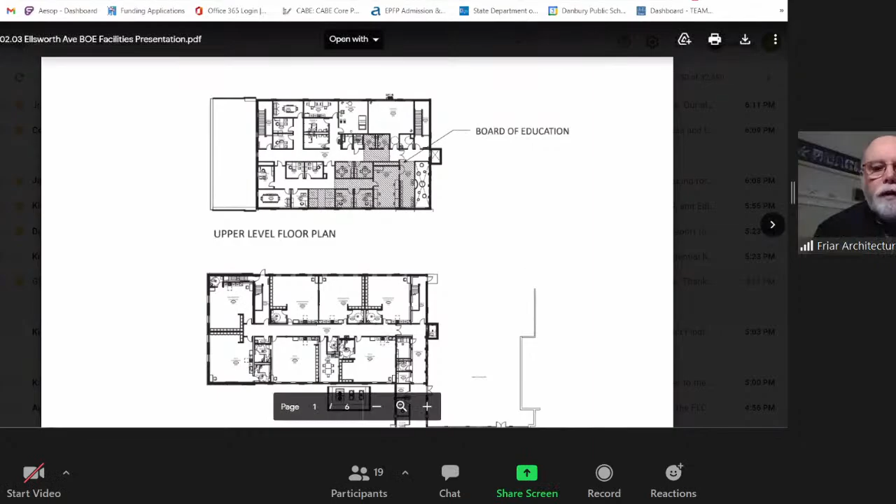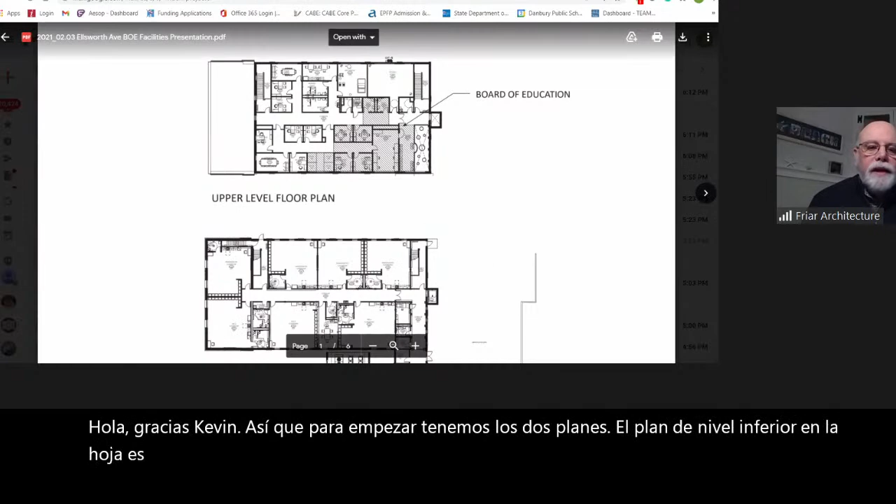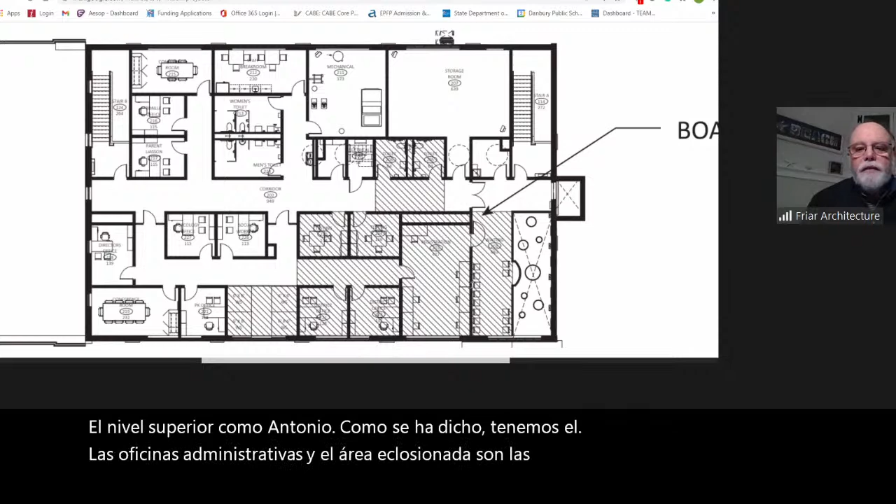Okay, thank you, Kevin. So to start off with, we have the two plans. The lower level plan, lower on the sheet, is your first floor. Just to orient you, Osborne Street is to the left, and the existing school is to the right. The upper level, as Antonio has said, we have the administrative offices, and the hatched area is the areas that are designated for the Board of Ed, the registration, testing, and so forth for the second floor.

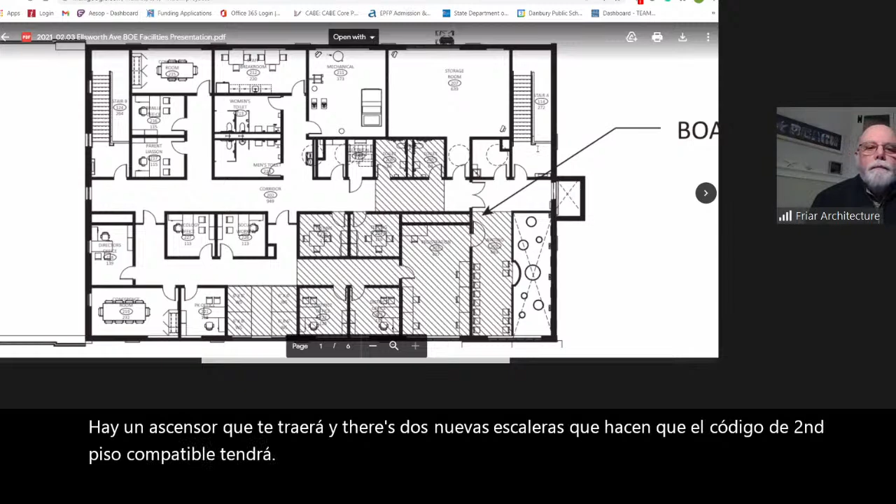So there is an elevator that will bring you up, and there's 2 brand new stairs that make the second floor code compliant. We'll have enough bathrooms up there for staff. There's also a conference room, a break room, and then we have mechanical and some storage space along with the offices for the individual staff. If we can go downstairs real quick.

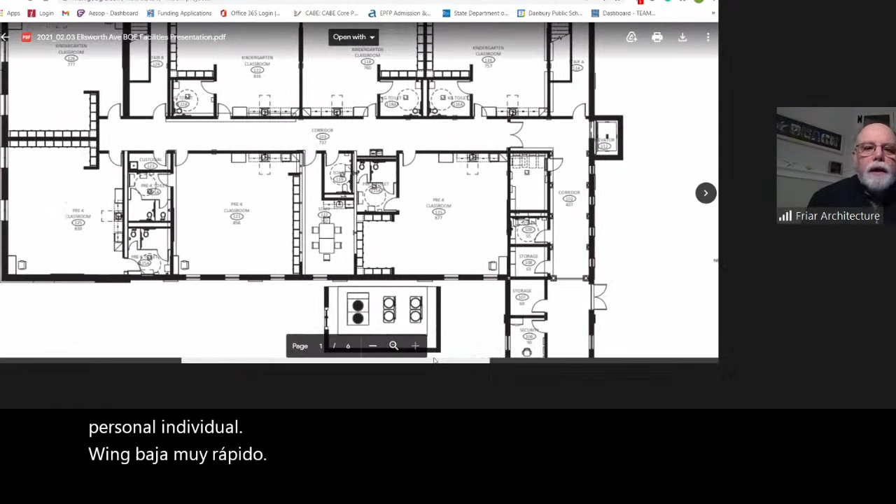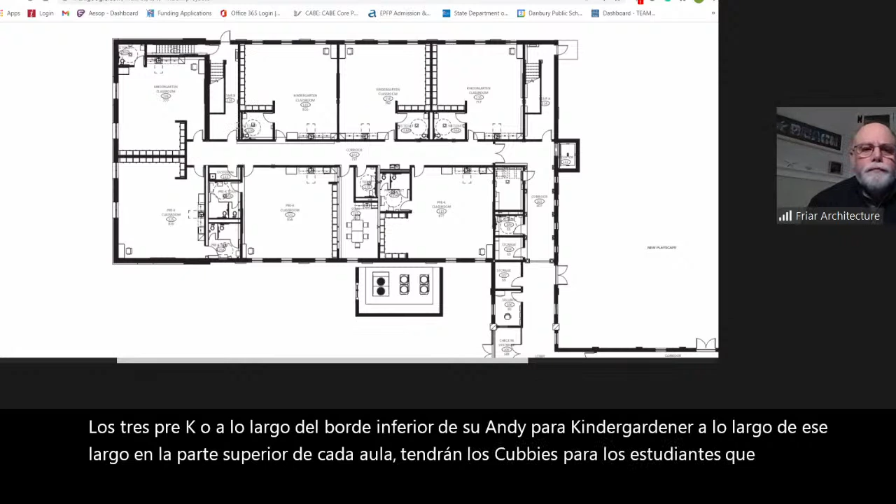Here we have our classrooms. The 3 pre-K are along the bottom edge there, and the 4 kindergarten are along the top. Each classroom will have the cubbies for the students. They will have individual toilet rooms, and the pre-K will have 2 toilets to meet that code requirement. We have again the elevator, and if you can scan down a little bit towards the entry, you'll see this is the new entry to this area.

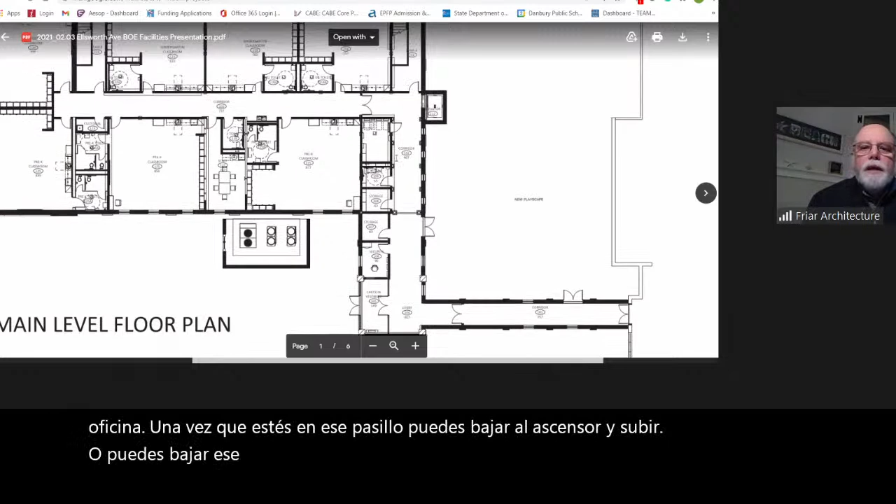It comes off of that parking lot that's already there into a secure area, and you will have to be buzzed in by the security staff that'll be in that office. Once you're in that corridor, you can go down to the elevator and go upstairs, or you can go down that corridor into the individual classrooms. The doors to get you into that classroom will be on access control, so there's limited access for other people that are coming in to go upstairs.

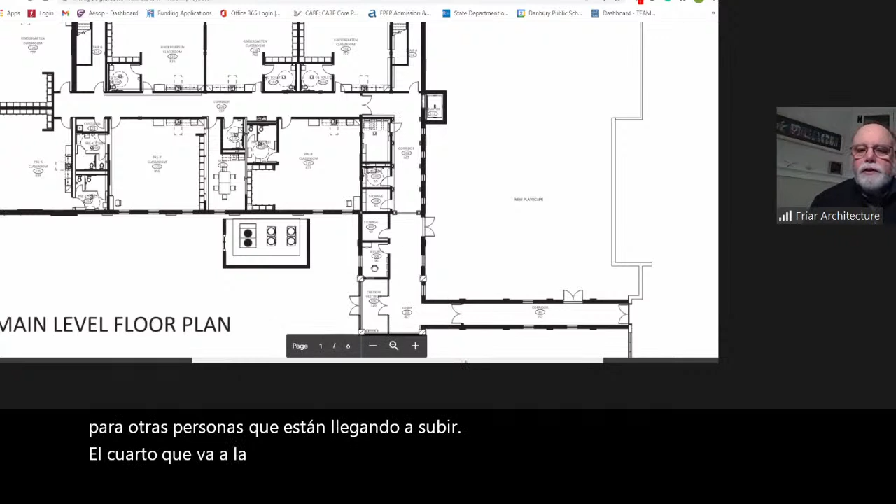The corridor that goes to the right will lead you back to the main school, and it's connecting right in the cafeteria. That's an existing door opening that's in the cafeteria. So the way it works right now is the students that may be in that cafeteria may be dismissed through those doors to the playground, or it's just an emergency egress. But in this case, you're going to come through that cafeteria, down the corridor, and into the annex, if you will, or you can go directly out into the new playscape area.

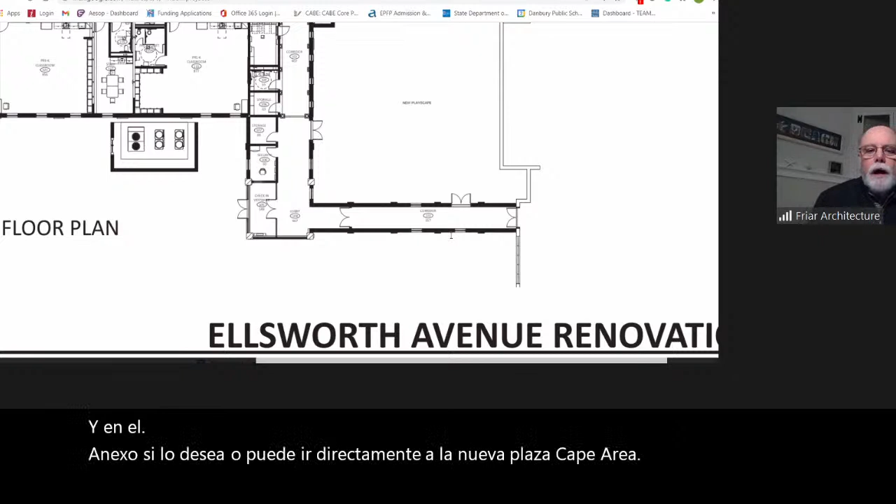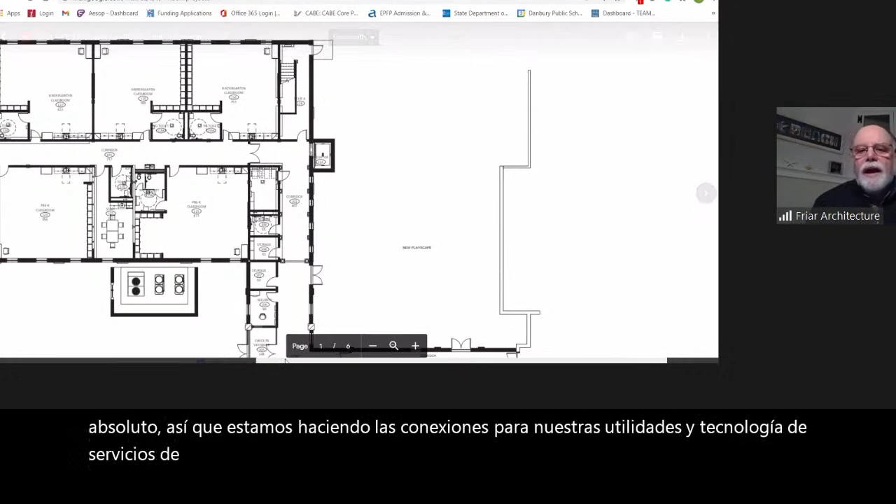There's no real changes inside the existing Ellsworth, no physical wall changes at all. So we're just making the connections for our utilities and services, technology, those kinds of things, so we can tie everything together to the existing school. If we go to the next slide.

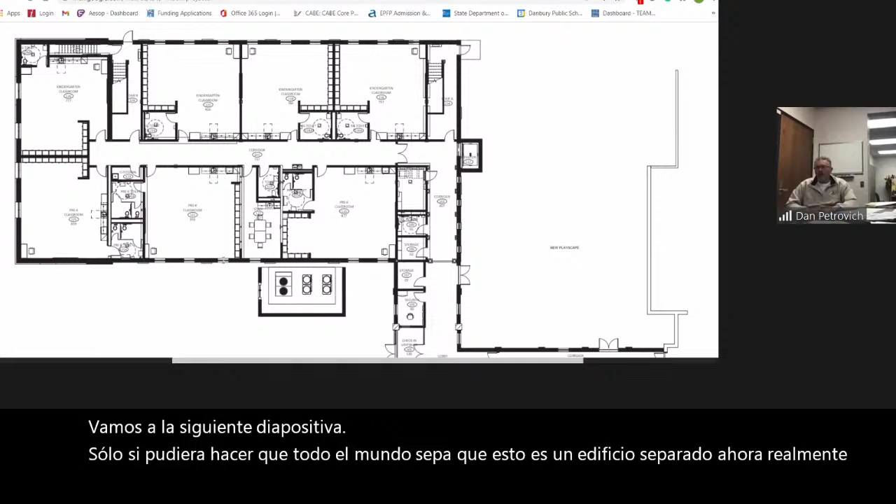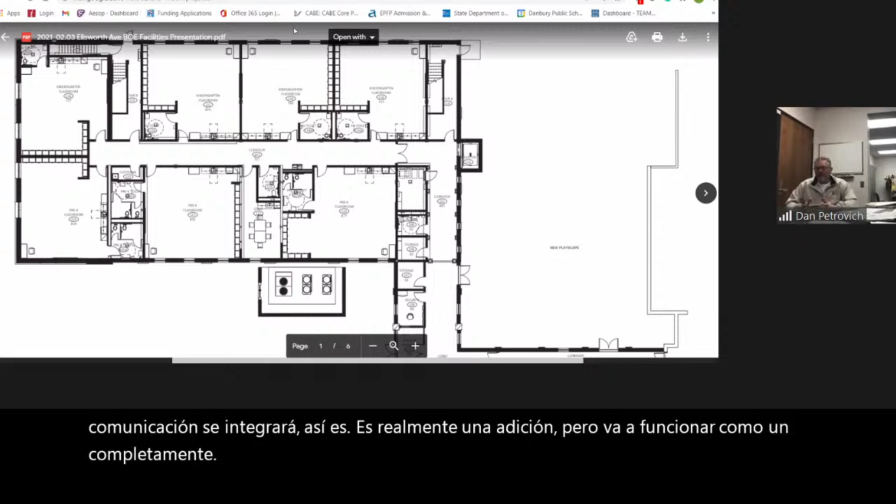Glenn, if I could just let everybody know that what is a separate building now will actually function as really one school. What I mean by that is the fire alarm system will all be integrated, the telephone system, the communication system will all be integrated. So it is really an addition, but it's going to function as a completely comprehensive and cohesive school. That's very important. It was very important for the staff to secure that need. Yep.

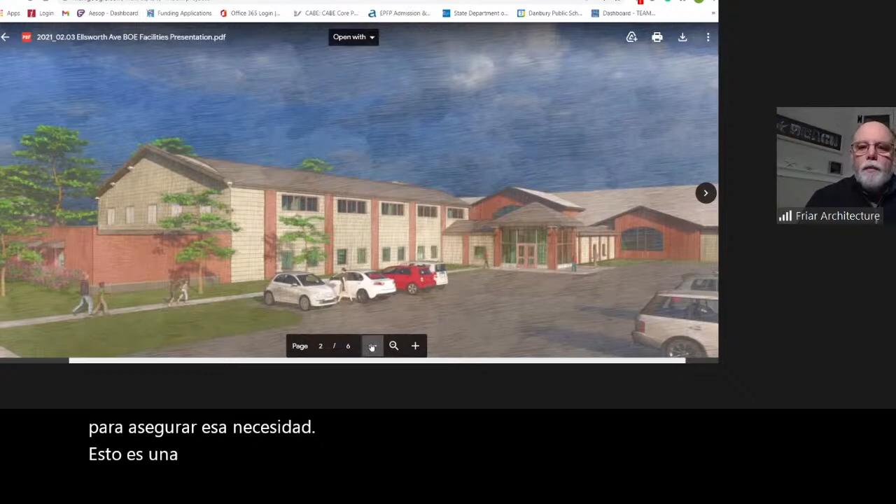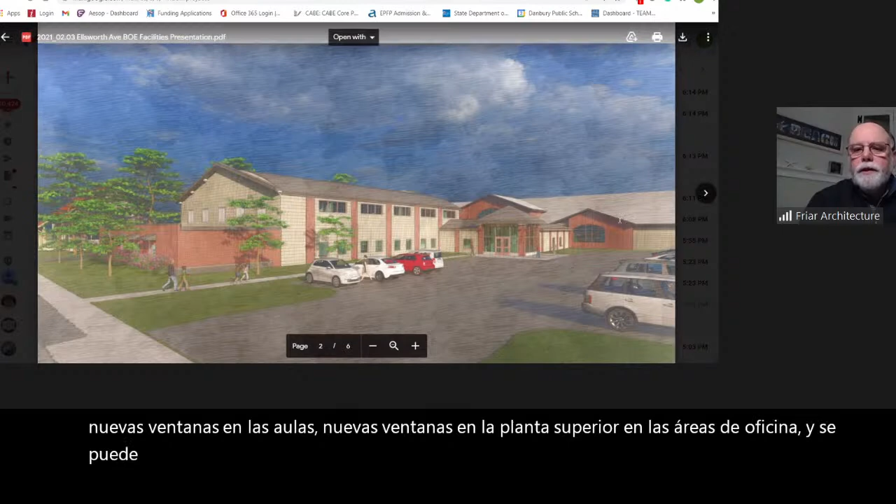The next slide. This is kind of a representative of what we're looking at. So you can see that from the parking area, Osborne Street is to your back as you're looking at this. We have got new windows going into the classrooms, new windows upstairs into the office areas, and you can see the point of entrance to the building. I think we have one more slide also.

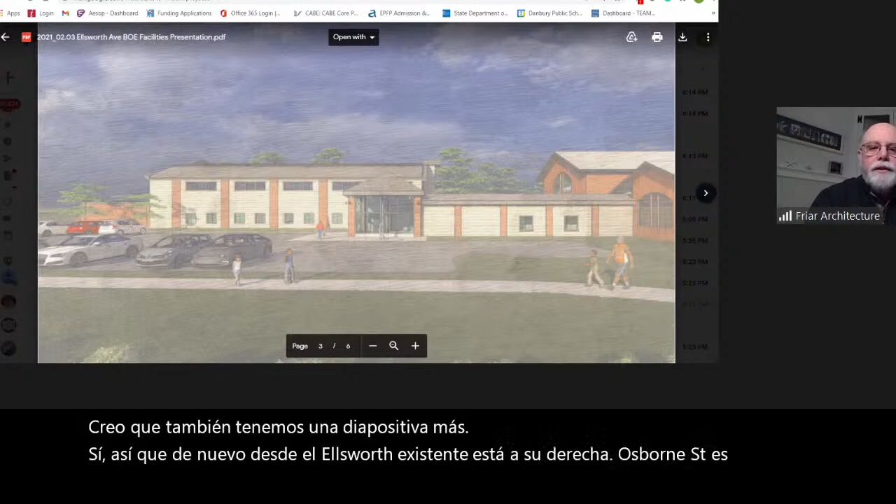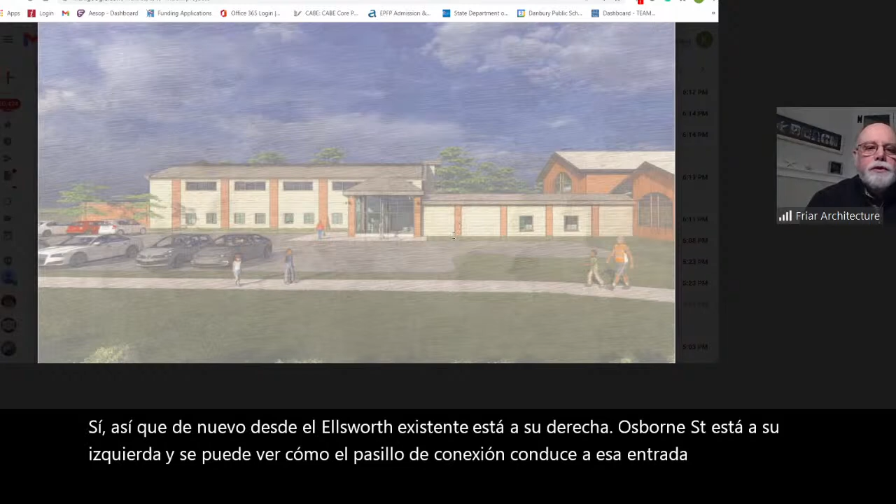Yes, so existing Ellsworth is to your right, Osborne Street is to your left, and you can see how the connecting corridor leads into that central entrance, and then the existing Osborne Street building in the background there.

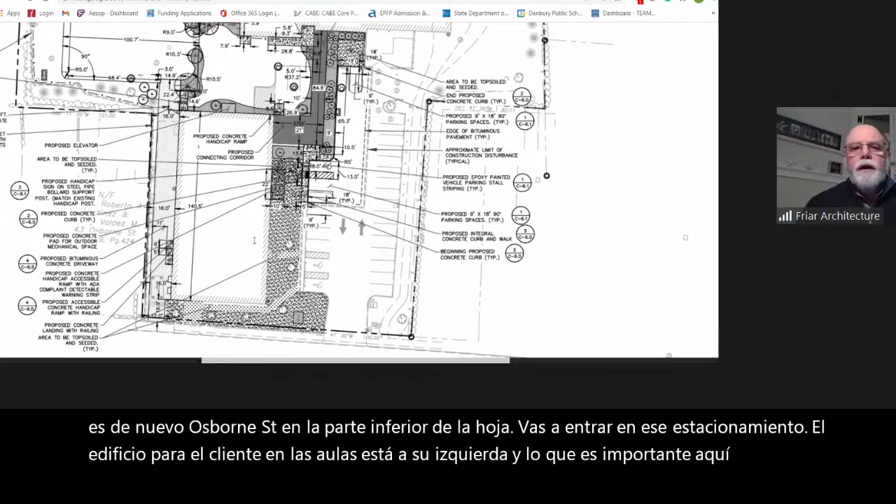So the site is in a couple pieces here. So what we're looking at right now is, again, Osborne Street to the bottom side of the sheet. You're coming into that parking lot. The building for the new classrooms is there on your left. And what's important here is that we're only taking away a few parking spaces in this parking lot, enough to put our new connecting corridor there.

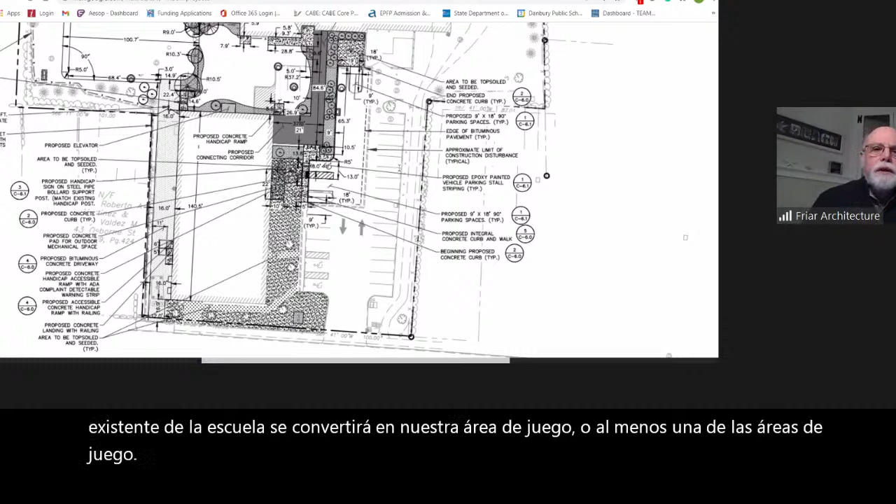So most of the parking spaces will remain, and then the area right now that is behind the existing building, between that and the existing gym of the school, will then become our play area, or at least one of the play areas. And I've got another slide which we'll get to to detail that, but just to explain a little bit more, if we can move the slide the other way up. There you go.

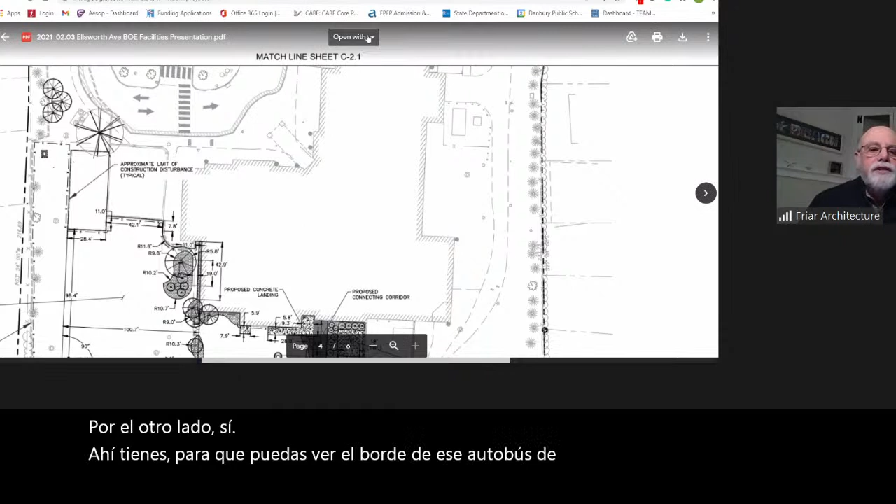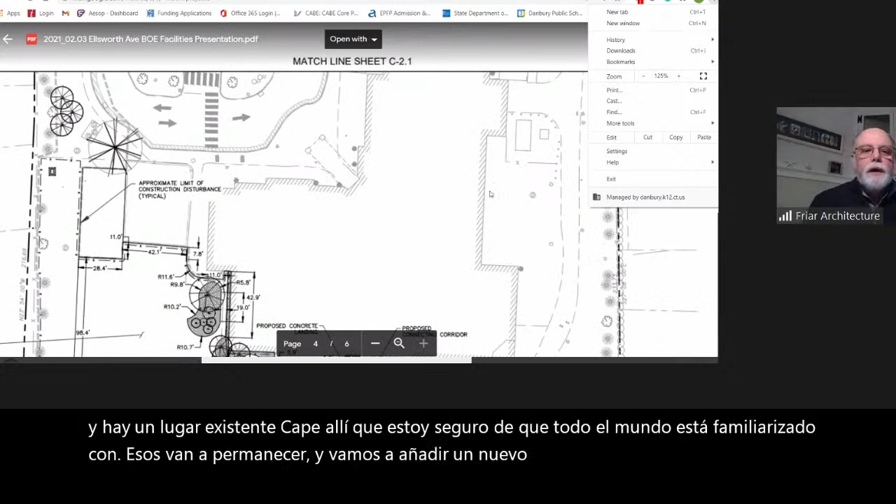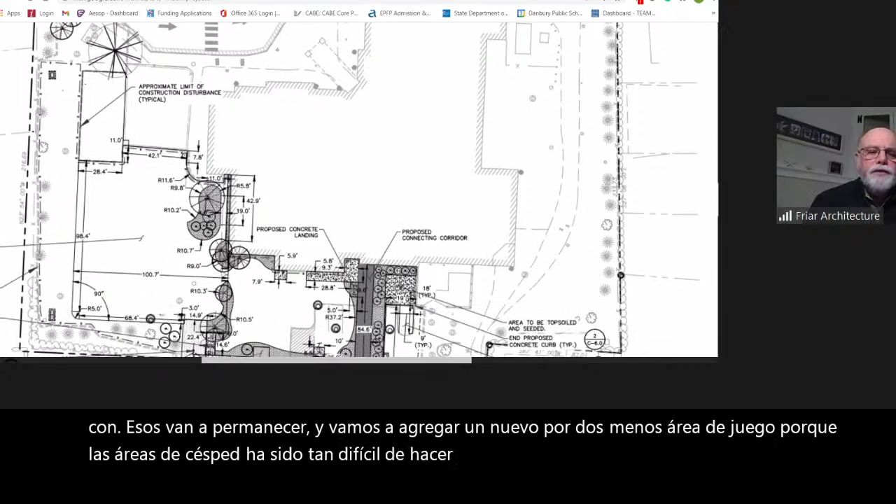So you can see the edge of that existing parking lot, bus loop, and there's an existing playscape there, which I'm sure everybody's familiar with. Those are going to remain, and we're going to add a new bituminous play area because the grass area has been so difficult to make usable. So it's going to be a bituminous area, and again, there's going to be a half basketball court in there and so forth, and I'll show that to you in a second as well. If we can go to the other half of the site now.

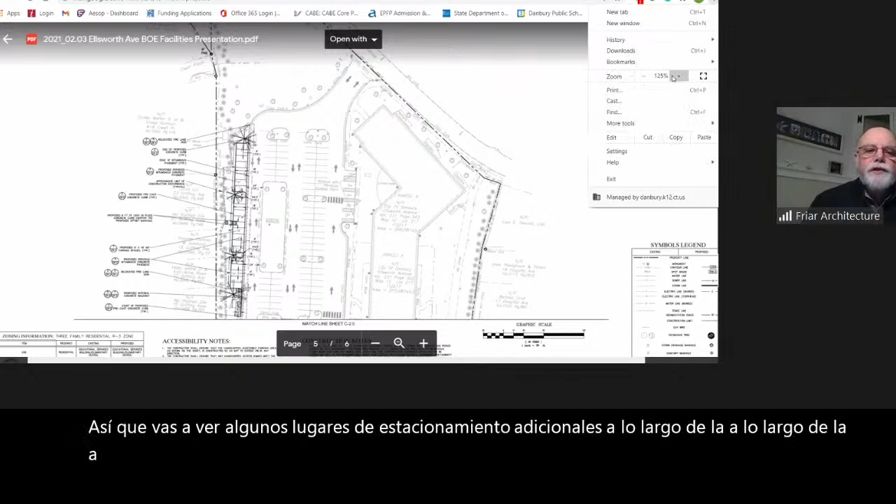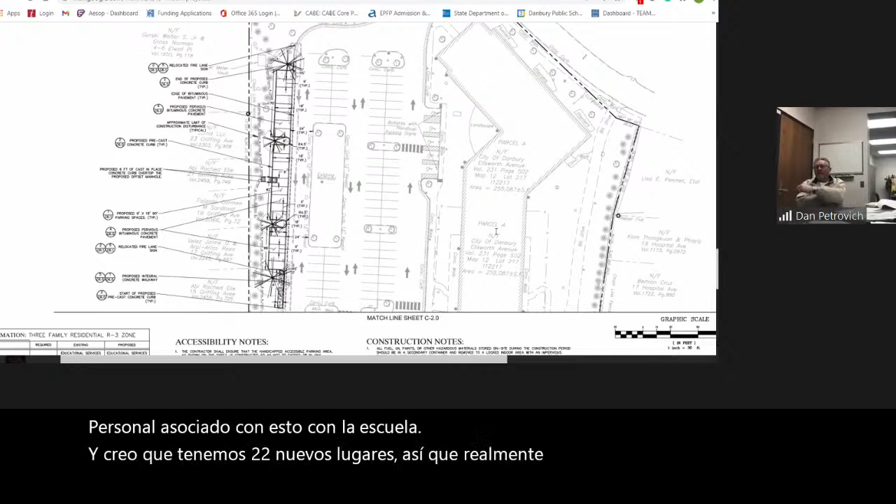So you're going to see some additional parking spots along the left side of this drawing, and those will be additional parking spots for staff associated with the school. And Glenn, I think we got 22 new spots. We didn't think we were going to be able to get that many, but we were able to get 22, which is really nice. So the parking that's on both sides should give plenty of parking between the school and registration, and will allow for some separation between those two functions.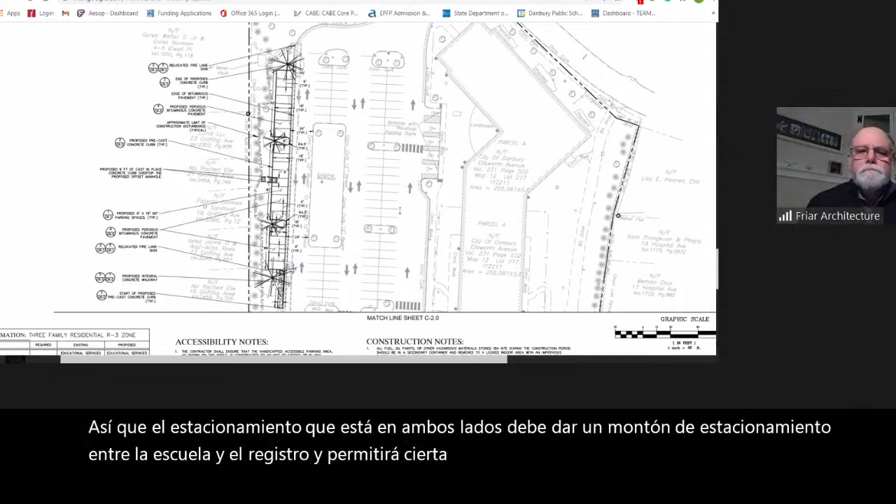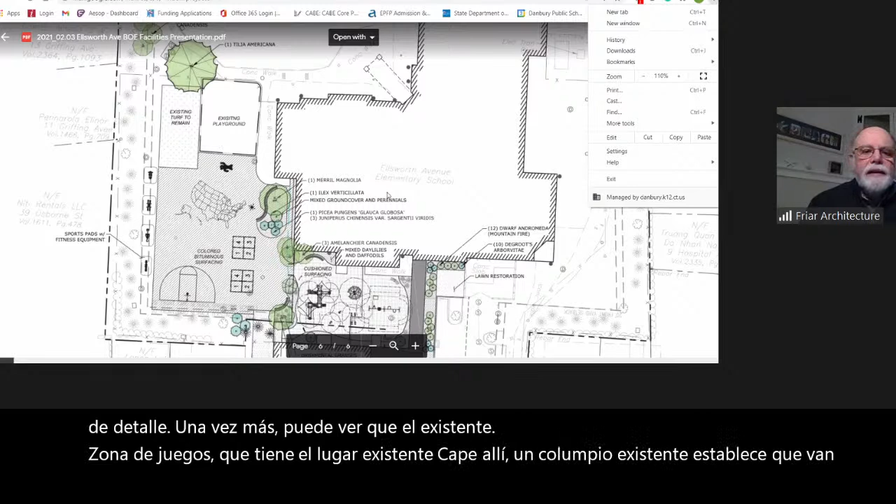And then the next site plan. This is a blow up of the play area to give you a little bit more detail. Again, you can see the existing playground, which has the existing playscape there and the existing swing sets. Those are going to remain, and we're going to add the bituminous area with some four square play areas, hopscotch, the half-court basketball, and something that's fairly popular, a painting of the United States that is used in a lot of places.

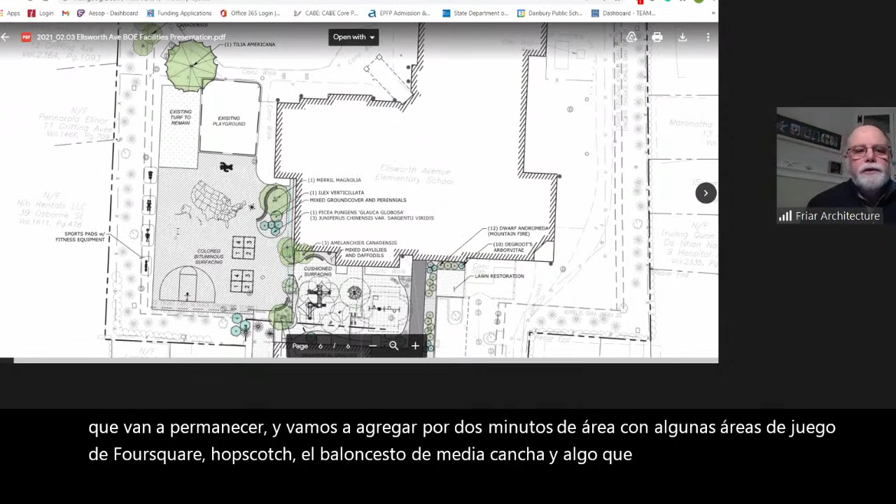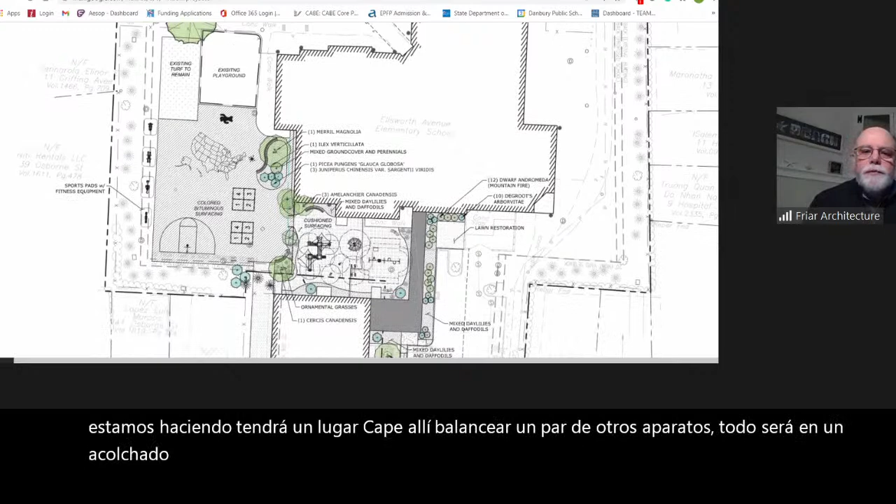And then between the two buildings, we have the playscape, which is going to be age appropriate for what we're doing. We'll have a playscape there, a swing, a couple other apparatus. It'll all be on a cushioned rubberized surface for safety. Each piece has a safety zone that's required, so you can't just cram a lot of items in there because you have to maintain a safety zone. So we've done that, and there'll be some benches and so forth in there. It should be really kind of nice for the students.

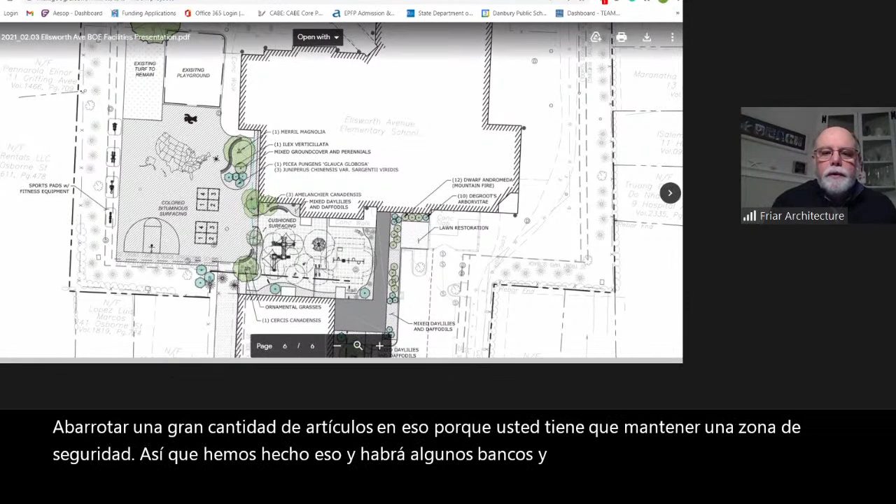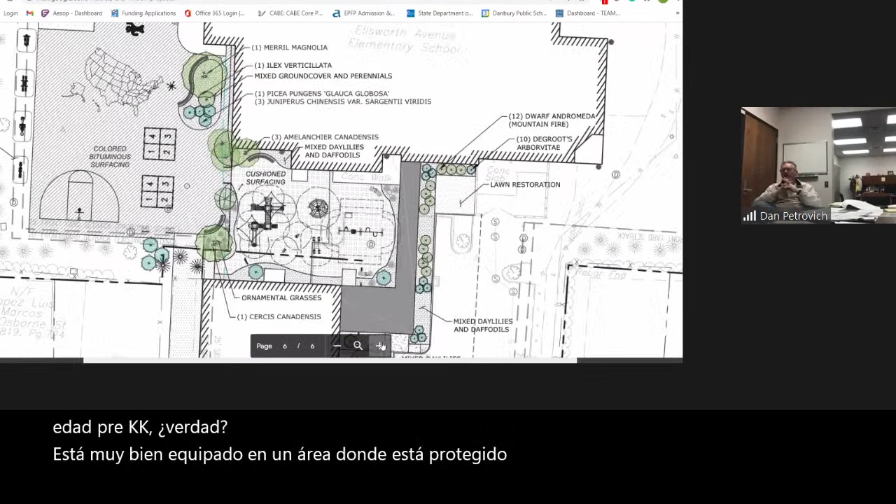And Glenn, that area predominantly is designed, and the equipment is designed for a pre-K age group, right? That's correct. Yeah, and it's nicely fitted in an area where it's protected. It's a nice isolated area, and you can allow those children to play there without really getting bumped or roughhoused by a little older children, which will be predominantly to your left.

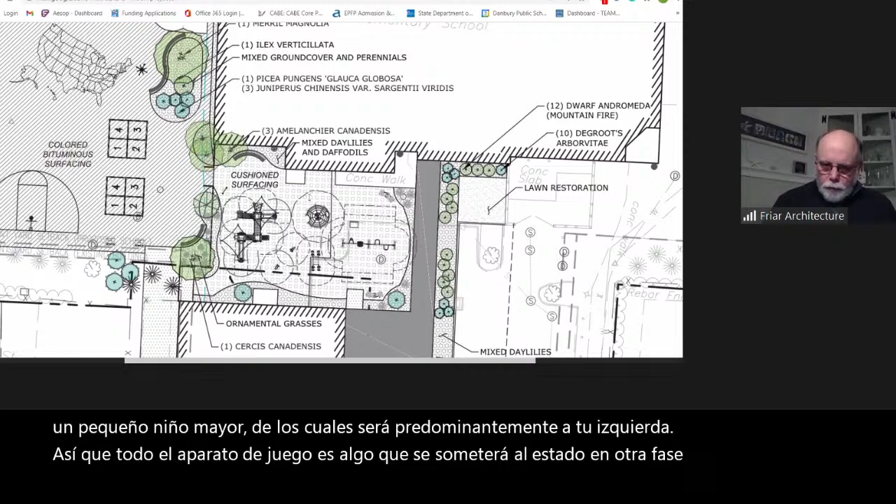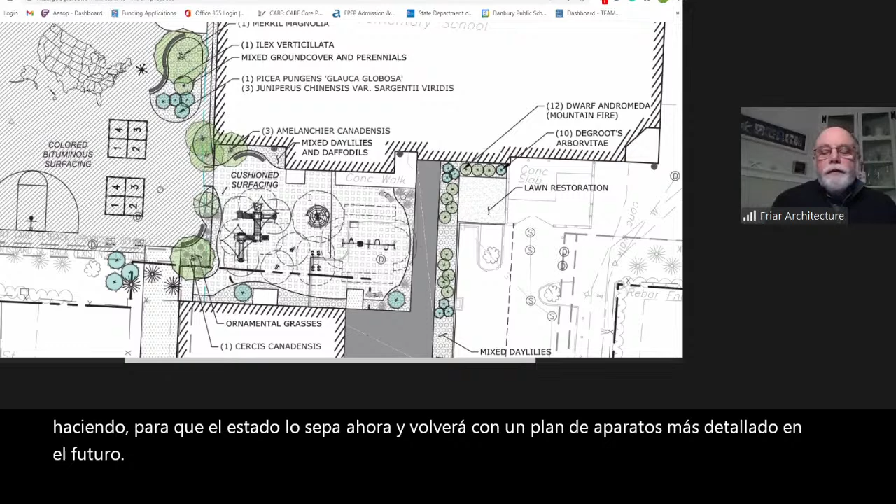So all of the play apparatus is something that will get submitted to the state in another phase of the project. But we're coordinating the larger images of concepts of what we're doing so the state knows now. We'll be back with a more detailed apparatus plan in the future. So that's real quickly a view of what we're doing.

We've been working, as Antonio said, several months. We've had my team as well as my consultants out to verify all the existing conditions. We've been through the existing school to look at utilities and how we're bringing things across. So as Antonio said, we're looking forward to an approval in March and getting this out to bid soon after that.

Thank you. Sal, before I move on, do you want to see if anybody has any questions? Ask the board. Joe, what do you think? Yeah, the only question I had is the reimbursement still all good to go on that project? Yes, the reimbursement, and that's the reason why we have all of these crazy meetings with the state, because we don't want to jeopardize that reimbursement. Yep. So we are scheduled to meet our reimbursement with very negligible, minimal, ineligible cost. Every project has a little bit of ineligible cost, but ours are very, very minimal.

One of the things I do want to bring up to you is the Board of Education space that will be used by the district on a district-wide basis. The reimbursement rate for that is 50% of what our full rate is. So we get just over 60%. So that is also eligible, but at a much lesser amount. But that's the way those projects are handled across the state of Connecticut.

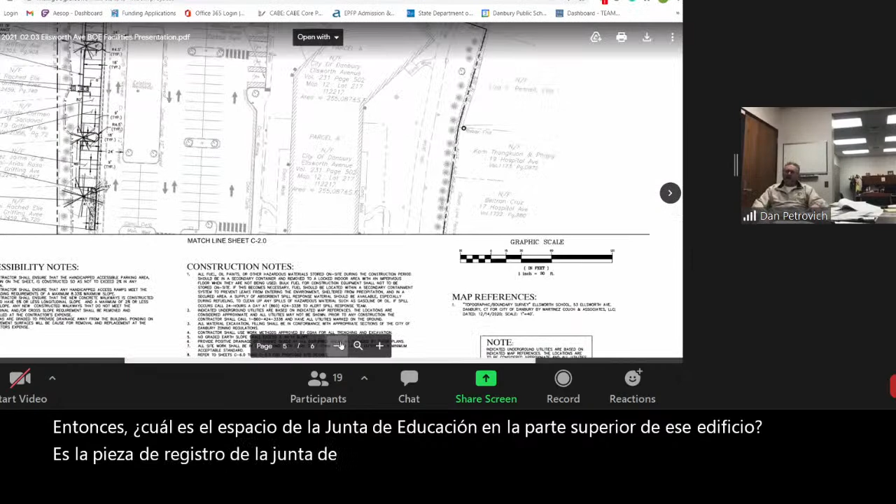Okay, great. Anybody else have any questions? Anybody else? Amy, go ahead. So what is the Board of Education space in the top of that building? It's the registration piece of your district-wide Board of Education, and it covers testing of brand new students coming in, determine placement and things like that. So it's sort of like your intake area for the entire district. Okay, great, thank you.

Al, you had your hand up too, I think. Yes, I had a question about, there was a mention of a bituminous play area, which leads me to believe asphalt. Did I understand correctly? That's correct. Asphalt versus pulverized rubber or AstroTurf? Well, part of the area is the rubberized surfacing, but the state does not reimburse for synthetic turf. So putting the rubberized surface is something that we limit, and it works better for certain games, basketball and so forth, to have the hard surface. We're going to colorize it so that it doesn't look like a parking lot, but we find that holds up the best.

I was more concerned with young child safety on an asphalt surface. Yeah. Right now, that area has been producing glass and other things, and it has been a problem. It's got to be either or. We can't leave it with grass. So whatever you guys come up with. So I just wanted to put that out there. All right, thank you. Anyone else? If not, Dr. Sal, we could go on to the next one. Okay, Antonio, go. Okay, let me just put this stuff away real quick.